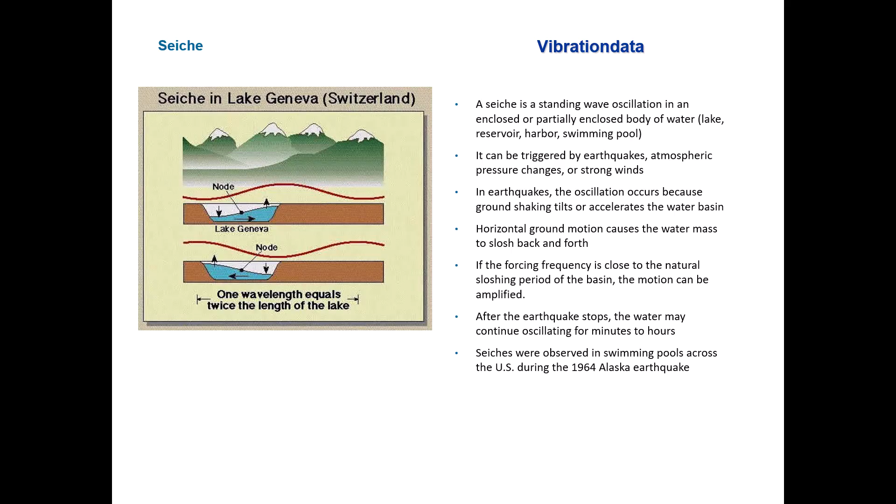Seiches were observed in swimming pools across the United States during the famous 1964 Alaskan earthquake, which we've discussed in a previous unit.

The Seiche fundamental frequency is 1 over 2L, L being the basin length, square root underneath gravitational acceleration times H, the water depth. The period is the inverse of that Seiche fundamental frequency.

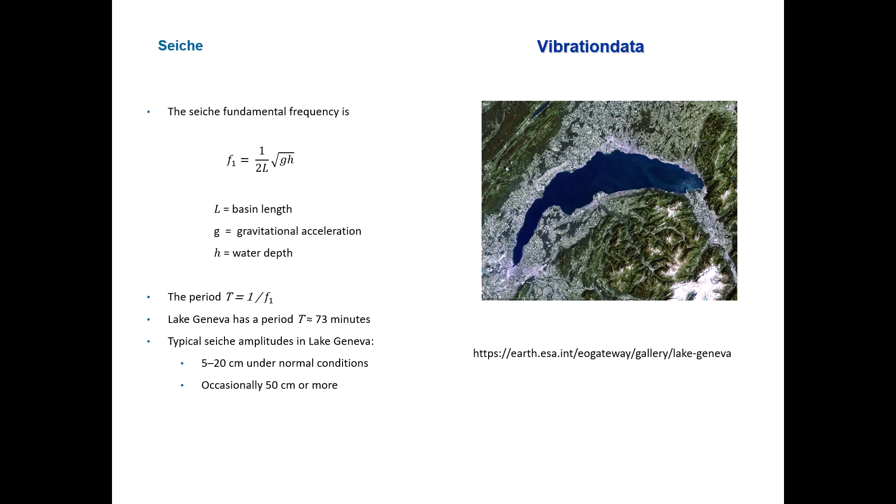For Lake Geneva, its period is about 73 minutes. The amplitudes in Lake Geneva under normal conditions may be 5 to 20 centimeters, and occasionally up to 50 centimeters or more. It's an interesting photograph there.

Seiches in the Great Lakes are always present at some low amplitude level. The lakes are so large that they're constantly being nudged into oscillation by the passing weather, such as pressure gradients, wind stress, etc., but not really much by earthquakes.

That's not a very active seismic area. So mostly weather rather than earthquakes.

Here is a Rayleigh wave. We've talked about Rayleigh waves before. They're surface waves, and they have a rolling motion, but the motion of the particles, or water molecules, or the ground, whatever it might be, is counterclockwise.

We call that retrograde. When a Rayleigh surface wave passes, the ground motion includes both vertical and horizontal displacement. The ground motion produces a temporary tilt of the basin floor.

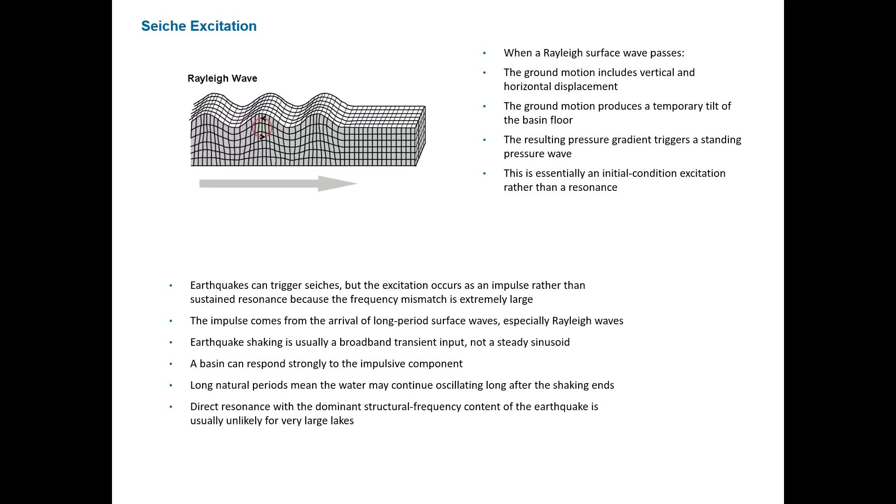Now, sometimes these tanks are bolted into the ground or anchored into the ground, and sometimes they're not, and we'll talk about that later on.

During earthquakes, liquid stored in tanks oscillates, and this is, as we mentioned, sloshing, or also known as convection, and damage can result. The roof can be damaged from liquid impacting on floating or fixed roofs, spills over tank walls leading to environmental release or fire in the case of a petroleum product.

Tanks can also undergo buckling modes. There are several types of buckling that are unique, or somewhat unique, to tanks.

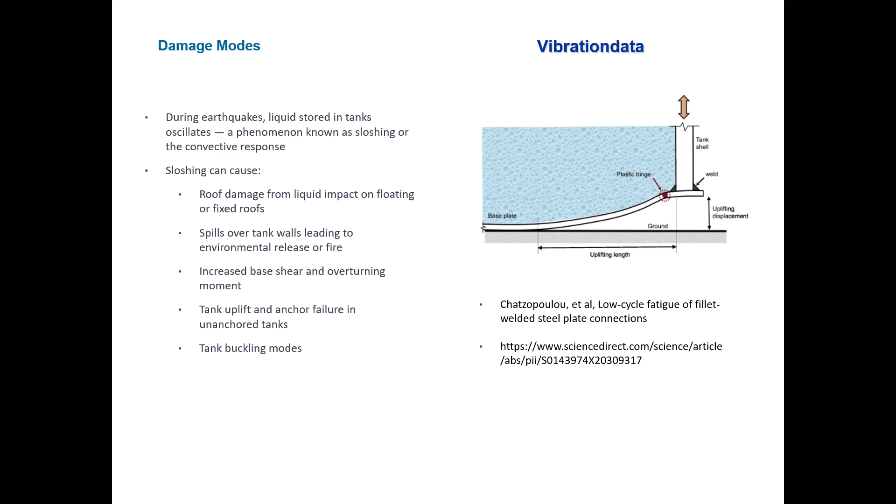During earthquakes, liquid stored in tanks oscillates, and that's sloshing or a convecting response. This can cause roof damage from the liquid impacting on the floating or fixed roofs, spills over tank walls leading to environmental release or fire, increased base shear and overturning moment, and tank uplift and anchor failure in unanchored tanks.

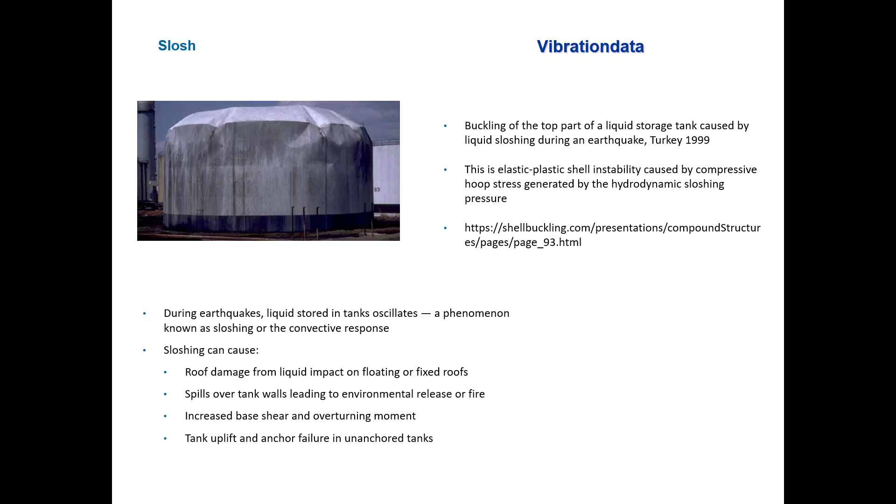Instead of complex fluid simulations, engineers represent the liquid as a system of discrete masses to calculate the forces and the torques exerted on the tank.

This model goes by several other names: the Slosh-Housner two-mass model, also referred to as a two-pendulum or multi-mass spring model. It's a simplified mechanical analogy used to predict the dynamic behavior of liquid in a moving container, such as a tank. It separates the liquid response into the impulsive and convecting, or sloshing, components with a conceptual, not physical, dividing line. The convective layer undergoes sloshing, so that's the top layer—it's going to have the slosh. You can see the slosh waveform at the surface, while the impulsive layer remains rigidly attached to the tank.

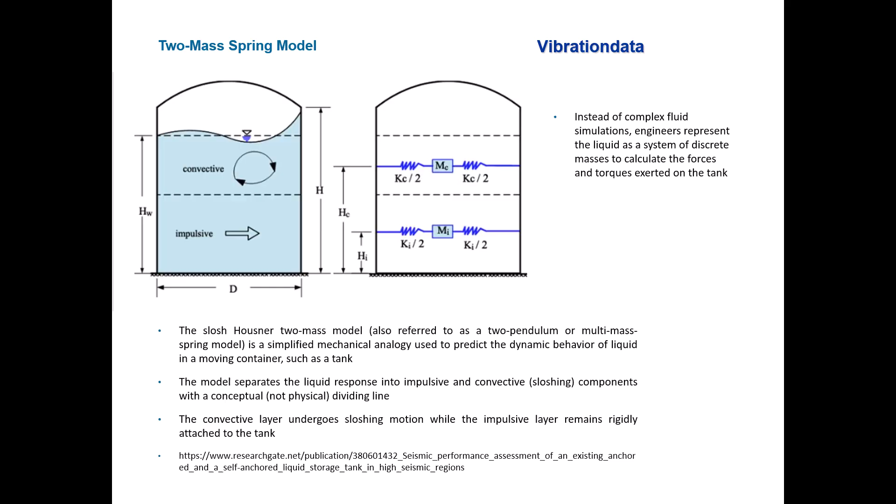The bottom mass is the impulsive component. The liquid moves together with the tank wall, resembling a rigid body acceleration with high frequency response in a short period, small displacement. It puts a large force on the tank wall, typically with a period of 0.1 to 0.5 seconds.

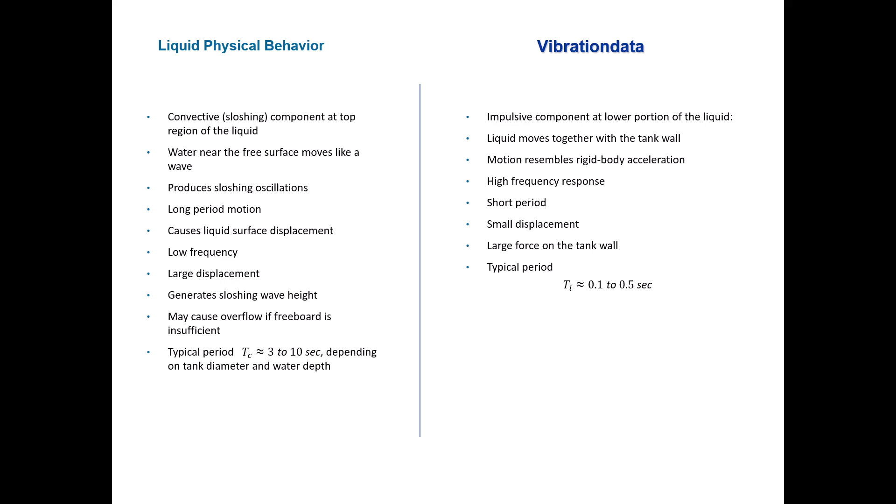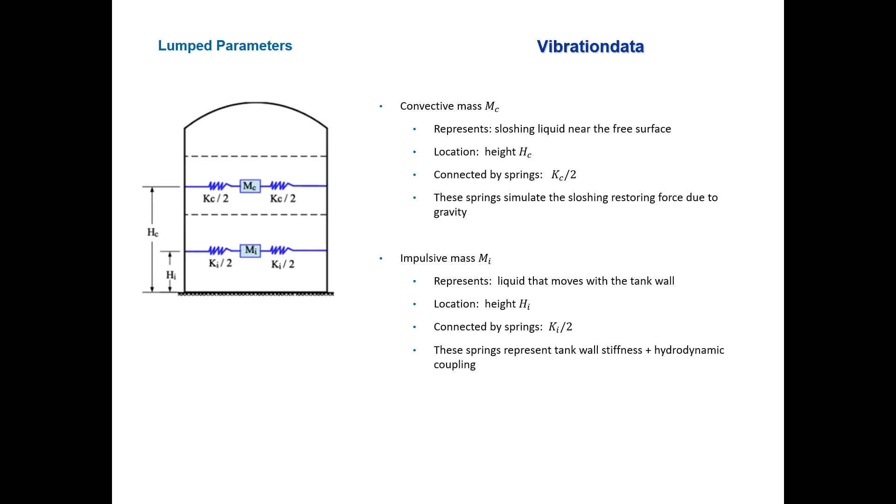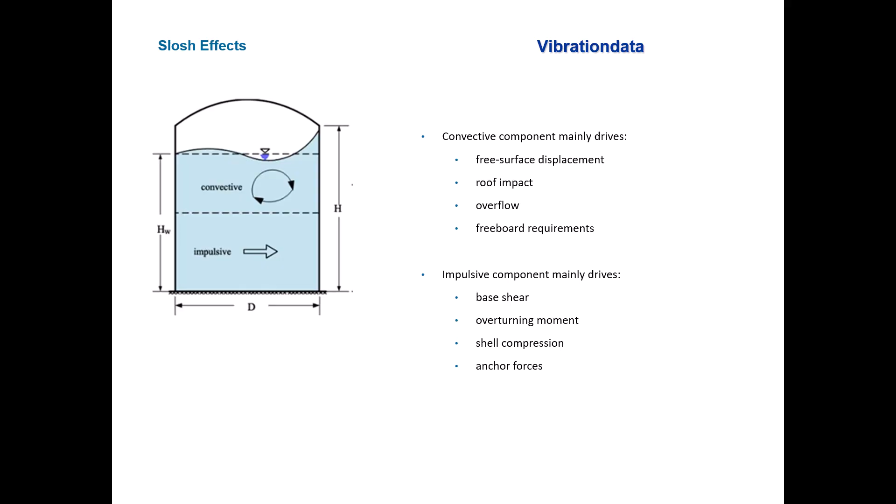Here's that familiar image again we saw before. The convective component mainly drives the free surface displacement, roof impact, overflow, and the freeboard requirements—again, freeboard is the extra room available at the top. The impulsive component mainly drives the base shear, the overturning moment, the shell compression, and the anchor forces.

Now here's a community water tank, fairly large one, up in the hills. Kind of looks like California. To show that you probably have one of these maybe in the area where you live, or you've seen these sorts of tanks before.

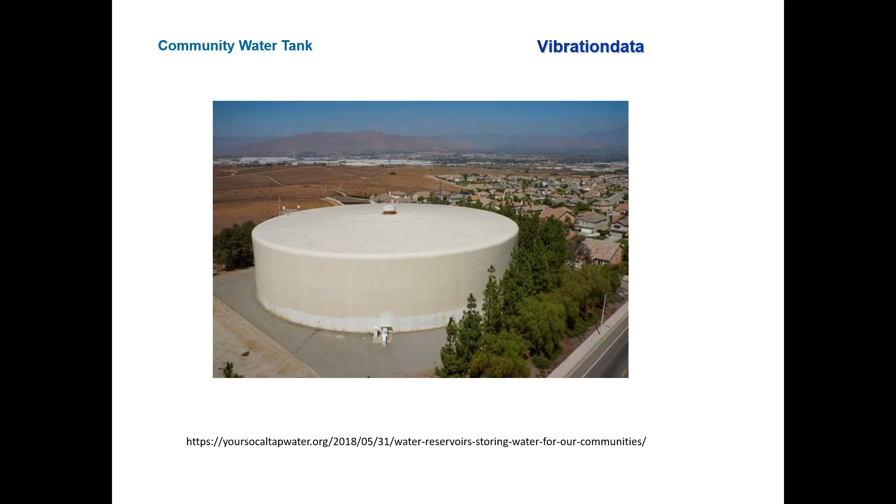Height and forces. We're going to do some calculations for forces and then the overturning moments. D will be the tank diameter, H the total liquid height, including the vertical displacement due to sloshing, HW the nominal height of the water or liquid. If I say water, you can substitute liquid. Height of impulsive mass, H sub I, and H sub C, the height of the convecting mass.

So the impulsive force for the lower mass, the impulsive mass, M sub I. F sub I equals M sub I times S sub A, which is a function of T sub I, which we need to define, and we'll do so shortly. And that acts at height HI and governs shell stresses.

And then the convecting force from the top mass, FC equals MC times S sub A, but now it's a function of T sub C. So T sub I is the period for the oscillations of the impulsive mass, and T sub C is the period for the oscillations of the convecting mass.

Now this S sub A as a function of T, whether it be T sub I or T sub C, is the peak acceleration response of a single degree of freedom oscillator with a natural period T, subjected to the earthquake motion, as taken from ASCE 7-22 response spectrum or elsewhere.

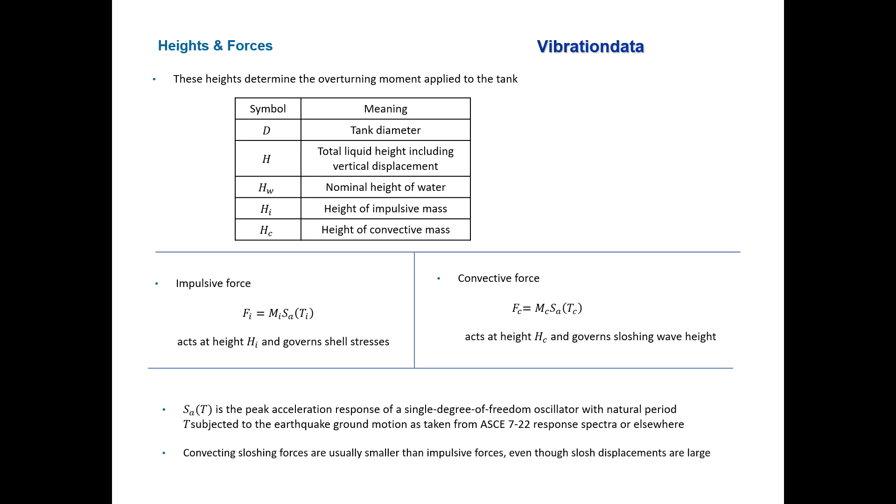So the total base shear is then V, and it's F sub I plus F sub C. And that can be used for anchorage and shell shear and so forth, sizing fasteners, and the anchor bolts.

And then the overturning moment is going to be M sub 0, and it's F sub I times H sub I from the impulsive, plus F sub C times H sub C from the convective. And the overturning moment is used for uplift. We talked about uplift before - anchorage design, shell compressive stress check, and foundation stability.

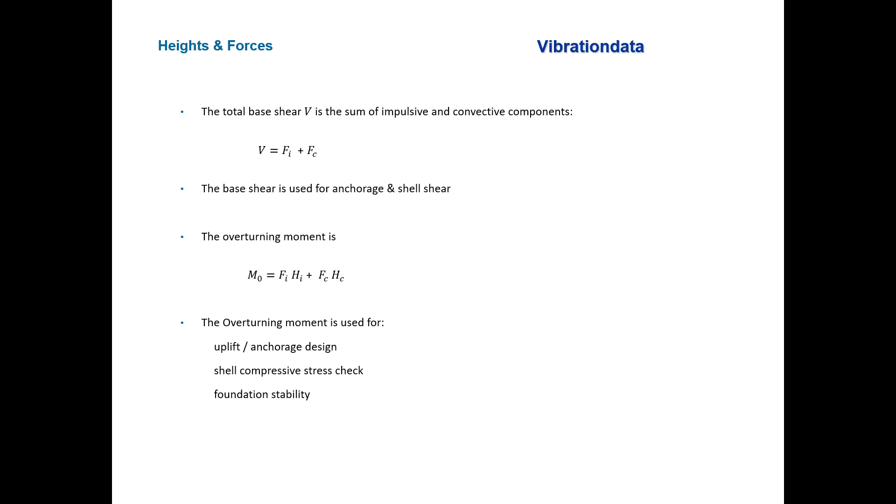Slosh wave height, delta sub S. So the maximum vertical displacement of the sloshing liquid at the shell is defined by delta S as follows: 0.2 times R, being the nominal tank radius, and then we've got A sub F.

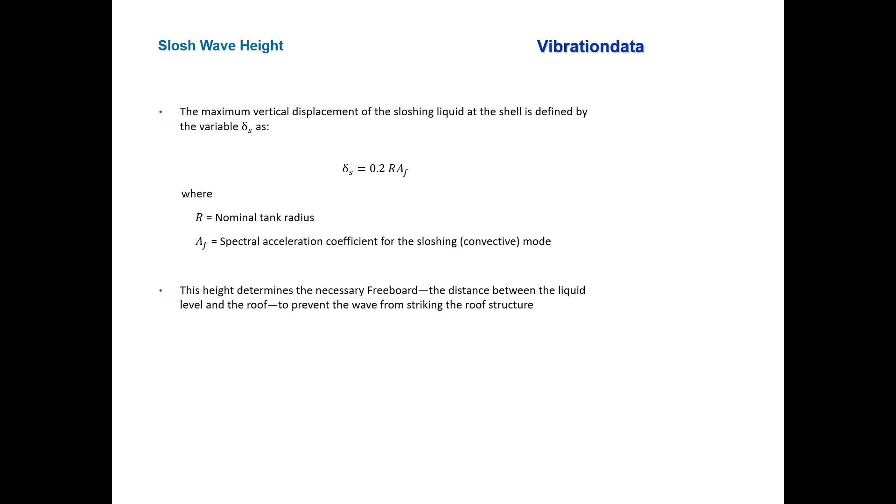A sub F is going to be a spectral acceleration coefficient for the sloshing or convecting mode. So we need to figure out where A sub F comes from. This height determines the necessary freeboard, the distance between the liquid level and the roof, to prevent the wave from striking the roof structure.

Spectral coefficient. So we're going to refer to the API 650 standard to get our A sub F, and that depends on where the convecting period Tc falls relative to the transitional long period T sub L. T sub L represents the boundary where the seismic ground motion transitions from being constant velocity to constant displacement, and comes from ASCE 7-22 based on the geographical location.

Then S sub D1 is the design spectral acceleration for a 1 second period, from ASCE 7-22. So we need both API 650 and ASCE 7-22 to make this calculation all come together.

So if Tc is less than or equal to TL - again Tc is the convecting period - then AF is equal to 2.5 K. We need to define what K is, and we'll do so shortly. SD1 is going to come from ASCE 7-22, and then 1 over Tc.

And then if Tc is going to be greater than TL, then we have AF is equal to 2.5 K SD1, and now we've got TL divided by Tc squared.

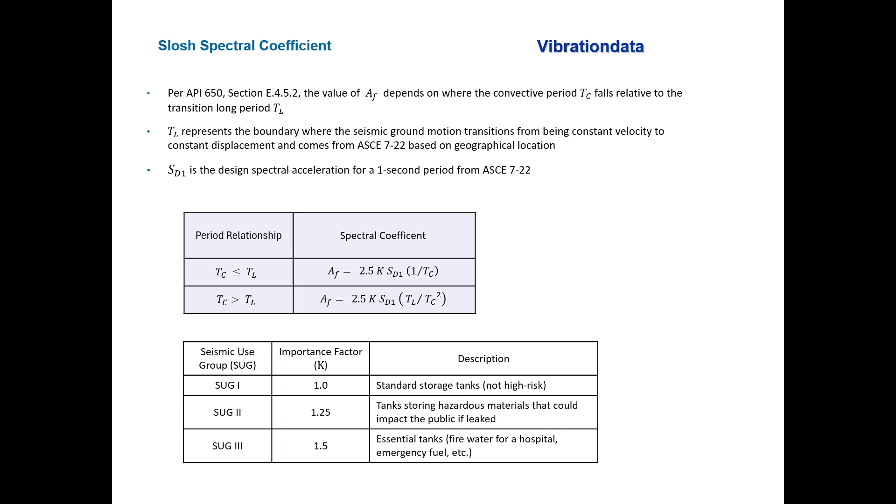So the K factor can be cross-referenced to a seismic use group, and it's going to be 1 for standard storage tanks - they're not high risk. It's going to be equal to 1.25 for tanks storing hazardous materials that could impact the public if leaked. And that will be equal to 1.5 for essential tanks - fire water for a hospital, emergency fuel, etc. So if you want to be conservative, then set that K value equal to 1.5.

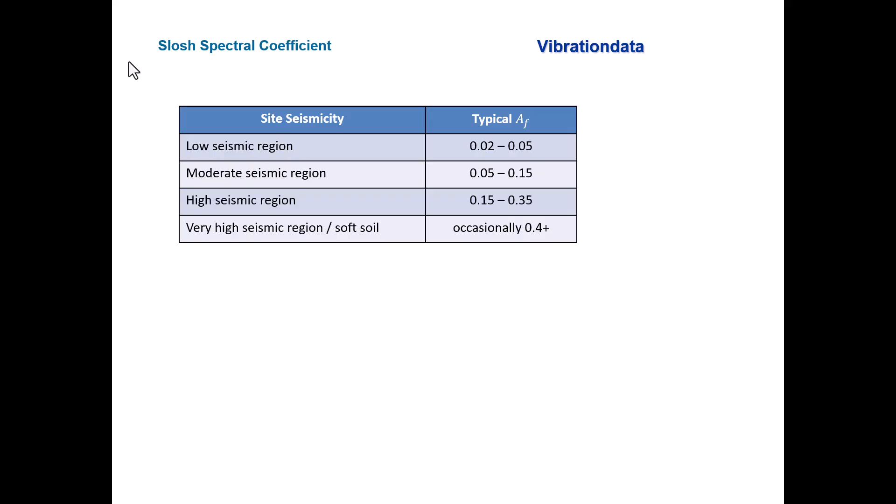And here's some sample slosh spectral coefficients and typical A sub F values. For a low seismic region, A sub F could be up to 0.05; for a moderate seismic region, 0.05 to 0.15; high seismic, 0.15 to 0.35; and for a very high seismic region or with soft soil, occasionally that coefficient A sub F can be above 0.4.

We'll have to do some MATLAB exercises. So here's the main GUI package: structural dynamics, then seismic, then select analysis, API 650, and Slosh and analyze.

We're on English units, and we'll be on Slosh wave height. So the height determines the necessary freeboard, which is the distance between the liquid level and the roof to prevent the wave from striking the roof.

Diameter of our tank is 150 feet, fairly large. Our coefficient is going to be A sub F, and it's going to be 0.1. Here's a little reminder chart we just saw on the previous slide, just as a guideline. We're assuming we're right in the middle of a moderate seismic region, and then we'll calculate.

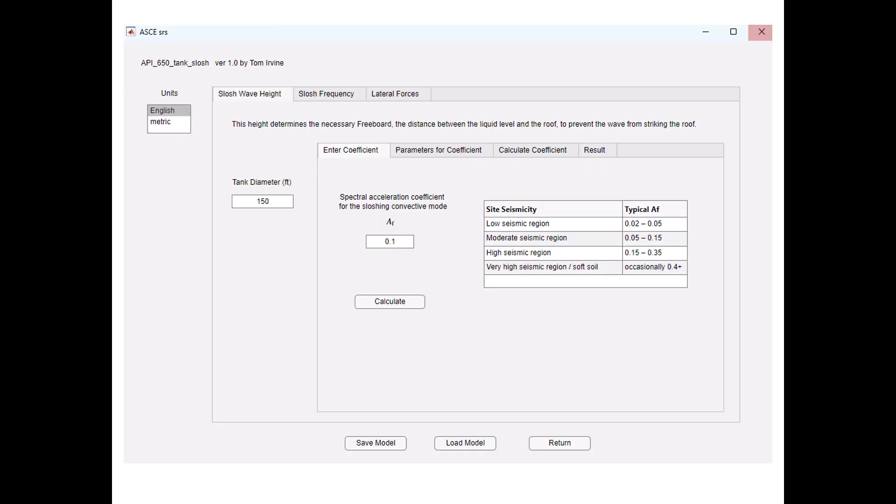For our tank diameter of 150 feet, the slosh wave height is 18 inches. So that's important to know.

Next, we're going to take a look at the lateral force tab, same API 650 tank slosh script. We have to add some parameters here: the top convective mass, that is 60,000 lbm, pounds mass. The bottom impulsive mass is going to be 340,000 lbm. The top convective height is 36 feet, and the bottom impulsive height is 11 feet. Again, those are referenced to the ground level.

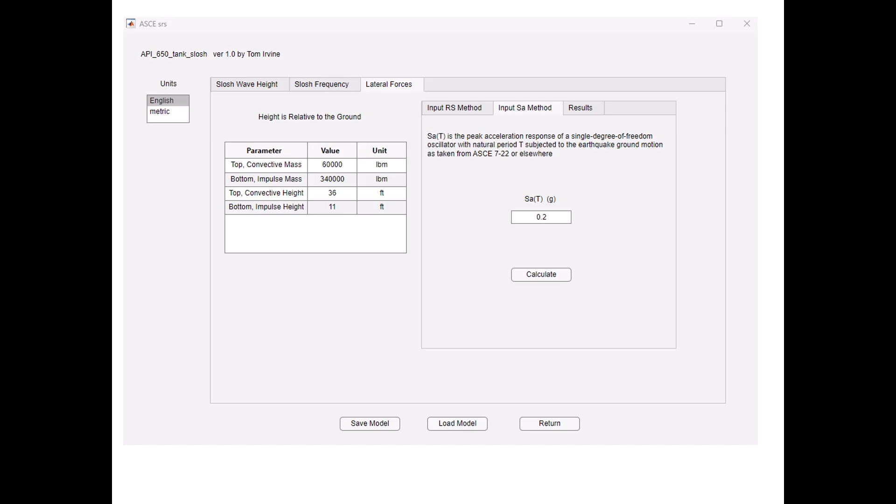Let's go to input SA method. SA is a function of the period t, the peak acceleration response of a single degree of freedom oscillator with a natural period t, subjected to the earthquake ground motion, taken from ASCE 7-22 or elsewhere. Our value today will be 0.2 Gs. We'll calculate.

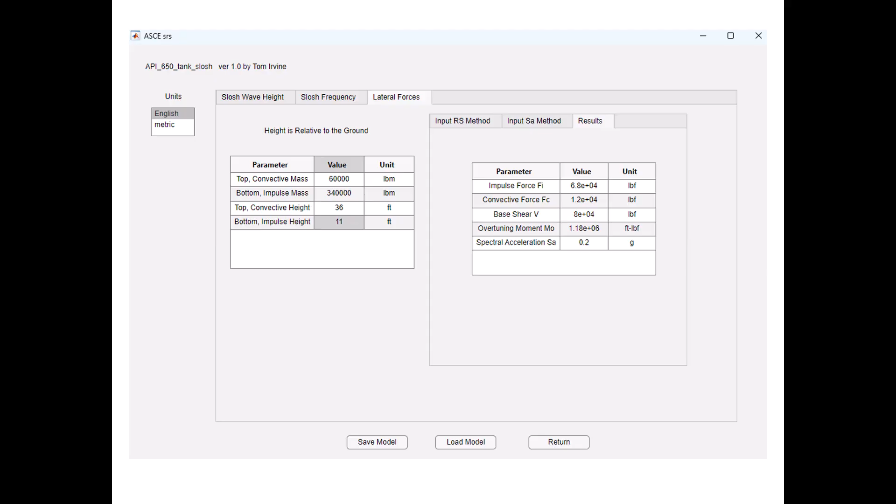And here are the results. We have the parameters, and the impulsive force is going to be 68,000 pounds force. The convective force is going to be 12,000 pounds force. If we add those two forces together, the base shear is going to be 80,000 pounds force. Our overturning moment is going to be 1.18 million foot-pounds. And the spectral acceleration, which is actually an entry parameter, SA, is 0.2 G.

So the results: the base shear is useful for a sliding check and an anchor and shell-to-bottom design. The overturning moment is useful for anchor bolt tension, uplift, and soil bearing pressure, and typically is the governing parameter rather than shear.

The impulsive force, Fi, we can take that and do some calculations for shell stress using API 650 Appendix E. We can calculate the hoop stress from hydrodynamic pressure, the anchor demand, and then the convective force and the sloshing effects and the freeboard and the roof impact. So that is the usefulness of the results.

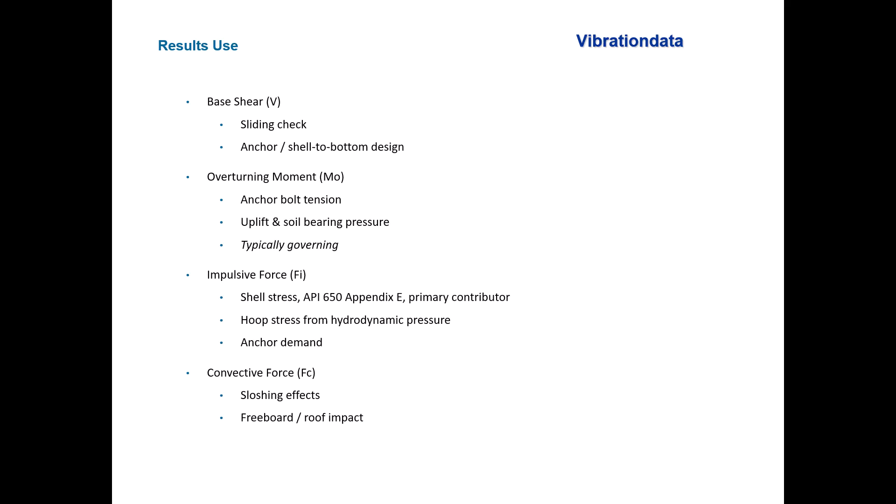For the hoop stress, sigma sub theta z is equal to the total pressure at height z, which would include hydrostatic plus any dynamic forces. We have r, the tank radius, divided by the shell thickness t. So the total pressure is the sum of the hydrostatic and impulsive pressures. The convective force is typically excluded from shell stress since it acts on a free surface.

The maximum stress tends to occur near the bottom of the tank. For a hydrostatically loaded upright cylindrical tank with a typical open top, the shell carries hoop stress but essentially no longitudinal membrane stress.

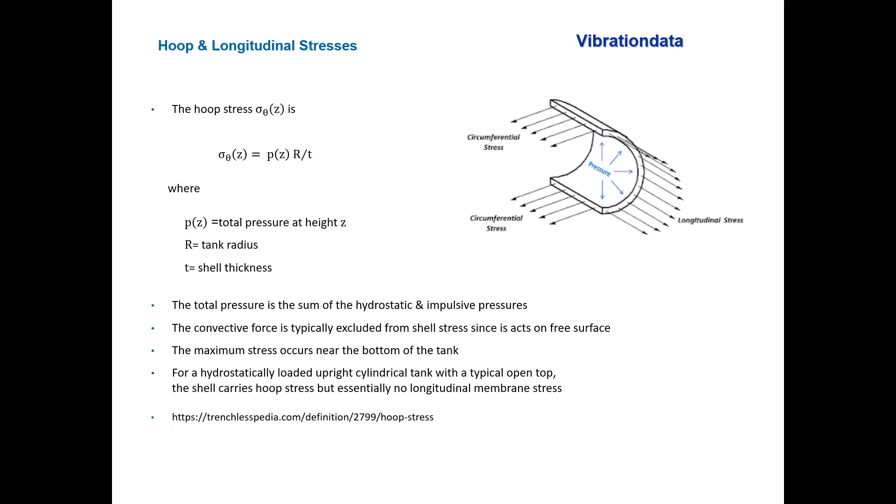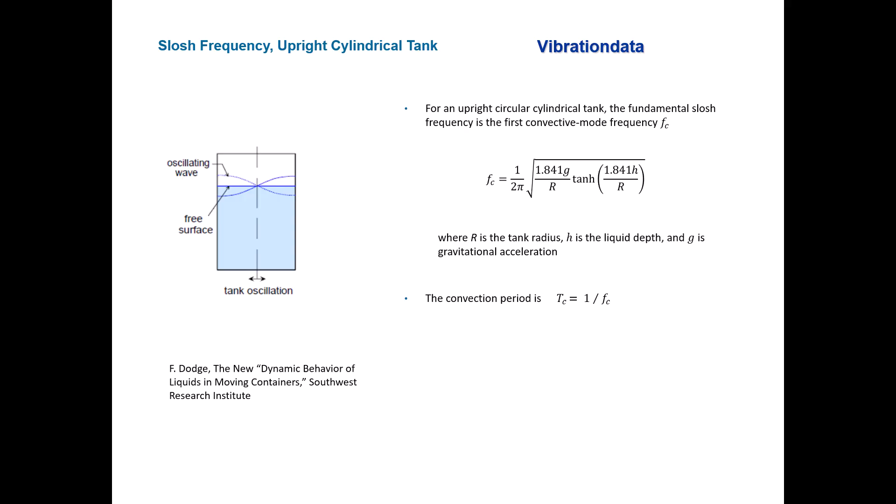And r is the radius. The convective period, Tc, is equal to 1 over the frequency Fc.

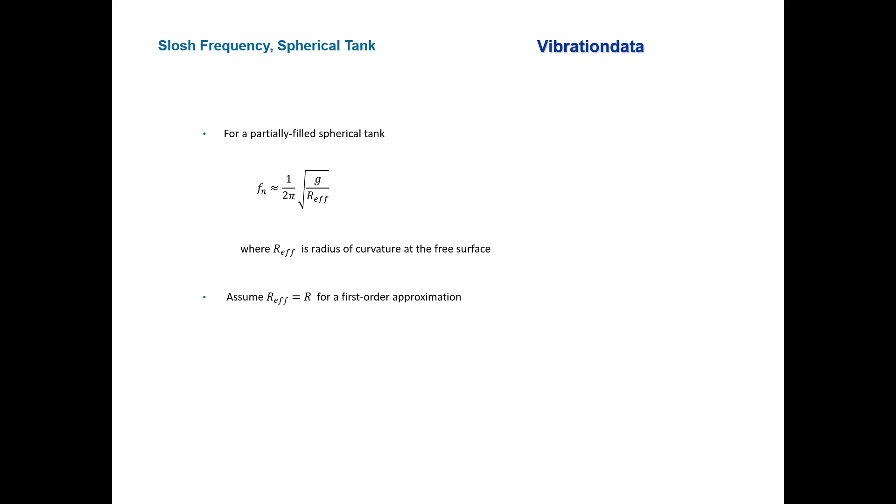For a partially filled spherical tank, we have a different equation: Fn is 1 over 2 pi, square root underneath g over r effective, the effective radius, which is the curvature at the free surface. For practical purposes, we can just do a quick approximation and say the effective radius is the same as the actual radius.

Let's do a little MATLAB exercise here. Go back to structural dynamics, to seismic, to API 650 tank slosh, where we just were a few minutes ago. This time we're going to go to the tab for slosh frequency. We'll still be in English units. Here's our 150-foot tank, with a height of 40 feet.

The convective slosh results are going to be a frequency of 0.123 hertz, and the equivalent period is about 8.14 seconds. That's within the range or family of a typical period, of course depending on diameter and height.

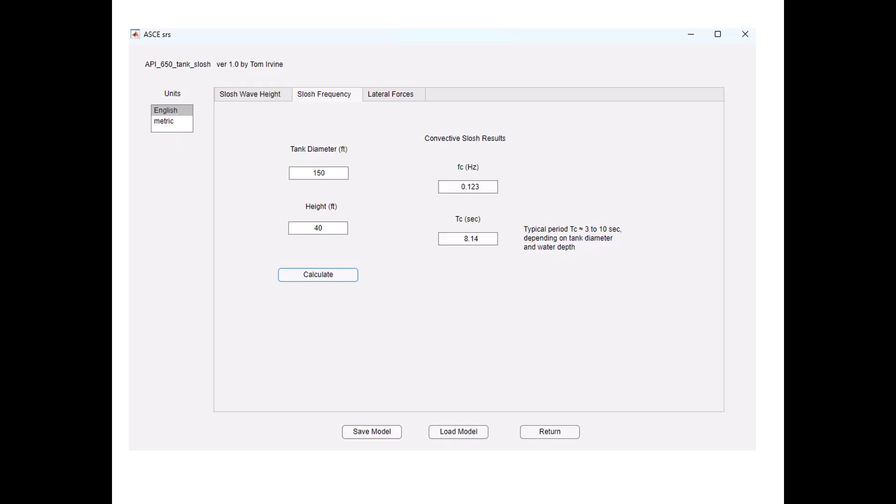Okay, tank anchoring. So we have two approaches: we can have the tank bolted down, or it can be a self-anchored tank that doesn't have any anchors.

As a practical observation, most large crude oil tanks are self-anchored because the liquid mass is enormous. The weight alone usually prevents overturning, and the anchors would be extremely large and expensive.

For the anchored tank, the anchors will prevent or at least limit uplift, but with the self-anchored tank, that uplift may occur around the outer circumference. Anchored tank: minimum rocking. Self-anchored tank: could have significant rocking.

Seismic resistance: the anchored tank has bolt tension plus the weight, and self-anchored is weight only. Our failure concern for the anchored tank is the bolts going into excessive tension, whereas for the self-anchored tank, we can have shell buckling.

Typical use: anchor tanks for smaller or tall tanks in high seismic areas, and self-anchored for large oil tanks with heavy contents. Remember that image we saw earlier today with the 1999 Turkish earthquake, and there was that buckling at the top of the tank - that was most likely a large crude oil tank that was self-anchored.

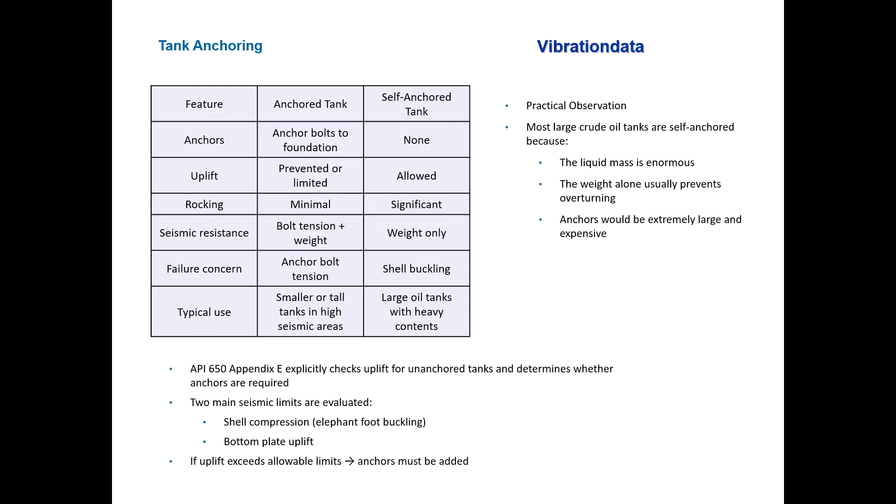API 650 Appendix E explicitly checks uplift for unanchored tanks and determines whether anchors are required. The two seismic limits that are evaluated are shell compression - we're going to see an image of something called elephant foot buckling here shortly - and bottom plate uplift. If the uplift exceeds allowable limits, then anchors must be added.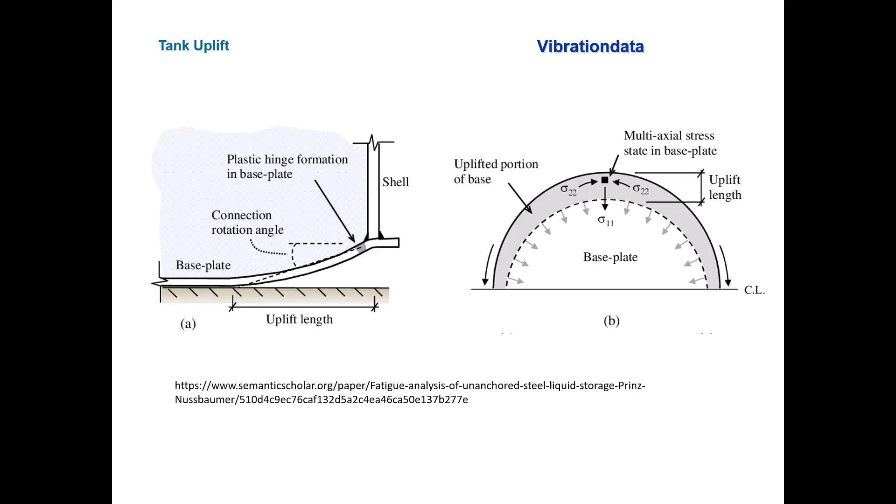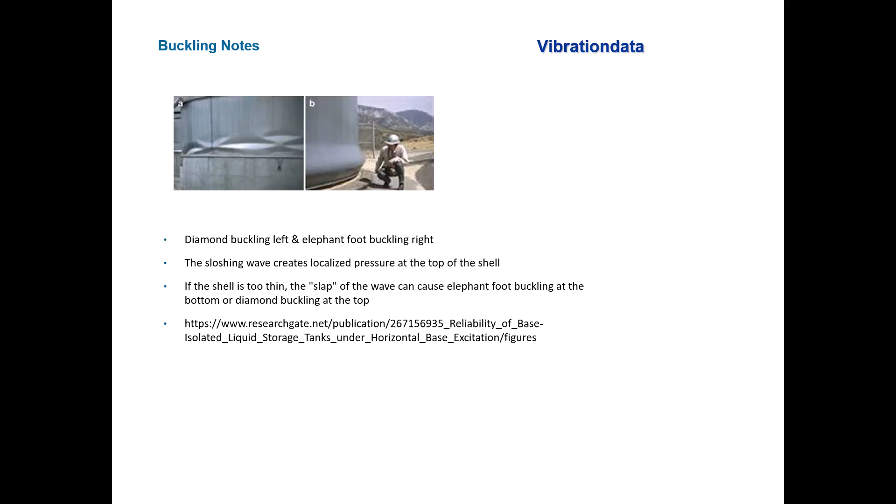Buckling notes: on the left we have diamond buckling, and on the right we have elephant foot buckling. The sloshing wave creates localized pressure at the top of the shell, and if the shell is too thin, the slap of the wave can cause elephant foot buckling at the bottom, or diamond buckling at the top, or diamond buckling could be elsewhere in the tank.

Tank roofs: on the left, fixed roof. On the right, floating roof, both containing liquids with vapor as well.

Floating roofs eliminate the free liquid surface, effectively suppressing convective sloshing loads that are the primary cause of earthquake-related tank damage, such as roof seal fires and liquid overflow.

Floating roofs increase the impulsive hydrodynamic loads on the tank shell and foundation, since more of the liquid mass moves rigidly with the tank shell rather than sloshing independently.

The roof structure itself becomes a seismic vulnerability. Support legs, seals, drains, and rolling ladders are all susceptible to earthquake damage, and a sudden floating roof sinking can trigger a catastrophic full surface fire.

Overall, floating roofs represent a trade-off rather than a net seismic improvement, and design standards such as API 650 Appendix E require special seismic detailing to manage their unique failure modes in active seismic regions.

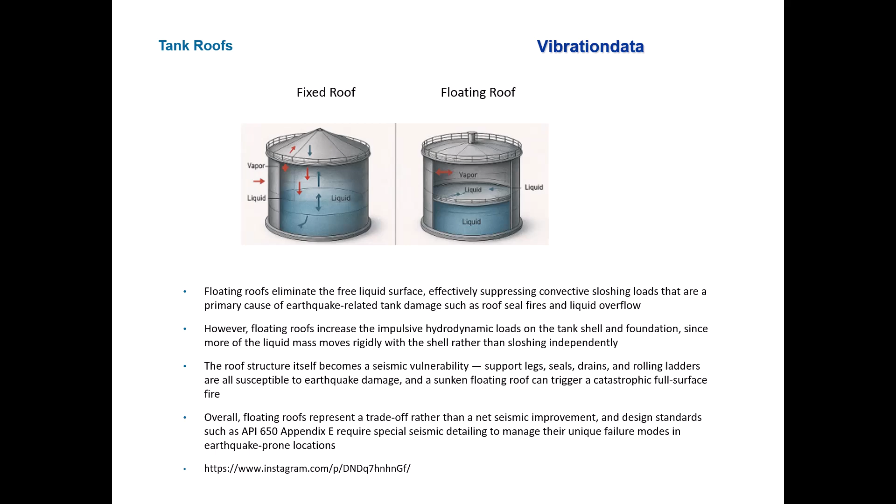Some damping notes. The image on the right is actually from a NASA document. Certain launch vehicles have liquid propulsion tanks, others have solid propellant, and if there's a liquid propulsion tank, then sloshing is a risk.

It's very common to have baffles, such as the annular ring baffle shown on the right. Sloshing effects are calculated using a lower damping value, usually about 0.5%, compared to structural impulsive mass at 5%, because liquid friction is much lower than structural damping.

Liquids like liquefied natural gas (LNG) and water have very low kinematic viscosity, leading to minimal internal friction during oscillation. The 0.5% damping value for the slosh is a realistic, or even slightly conservatively low, estimate for the convective sloshing component for low viscosity liquids.

High viscosity liquids like crude oil tend to have higher kinematic viscosity, which increases energy dissipation as the liquid layers slide against each other and the tank walls. For these heavy contents, the actual damping may be slightly above 0.5%, though design codes such as API 650 often maintain the lower value to ensure a conservative safety margin for wave height and freeboard requirements.

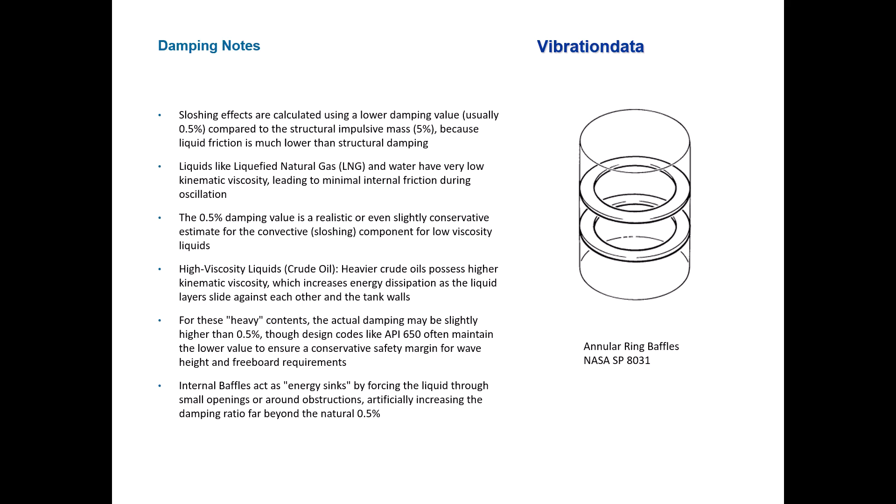Water towers are not just tanks. What this is, is a cantilever beam, a very tall cantilever beam with an end mass. That's what it's acting like, and there can be significant dynamic amplification. The governing behavior is the structural effects and then the fluid coupling that occurs due to the fluid in that spherical tank mounted at the top.

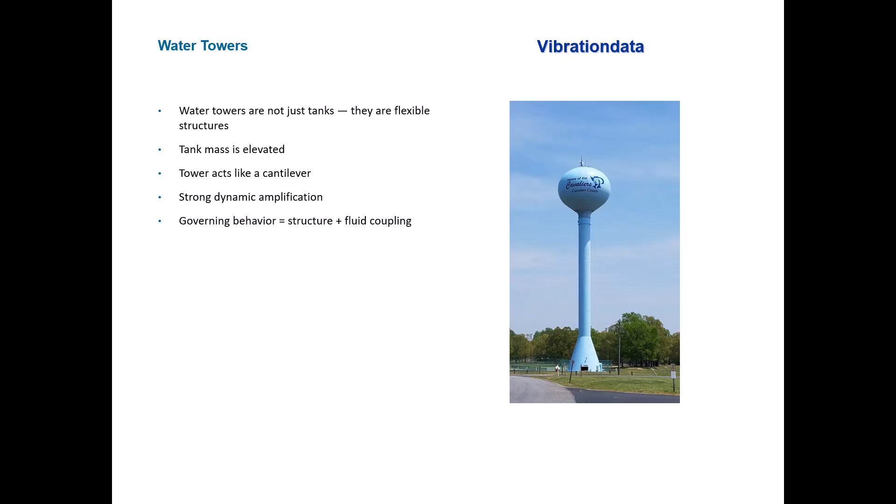Here is a water tower natural frequency. I don't have this in MATLAB, but I need to take an action item to put this in. So let's assume the shaft, the cylindrical support, is linear elastic with a uniform cross-section. The tank is rigid, no shell flexibility. The soil is rigid, fixed base. For soft soils, soil structure interaction reduces F sub n further. And small amplitude, linear type vibrations.

So here is our fundamental natural frequency equation: 1 over 2 pi, square root. In the numerator, 3 times elastic modulus times area moment of inertia, divided by the length cubed. In the denominator, the mass of the tank and its water contents, 0.67 times the water mass, plus 33 divided by 140 times the mass of that support shaft. There's a note that the 33/140 factor is the classical Rayleigh correction for a distributed mass cantilever contributing to tip oscillation.

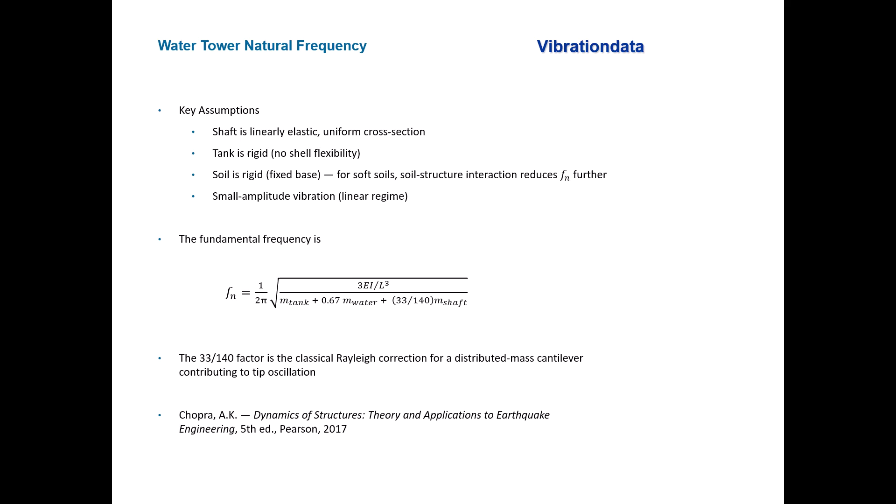Okay, Seiche and slosh mitigation. We talked about LNG, liquid natural gas or liquefied natural gas, and petroleum tanks and large water reservoirs. Increase freeboard to prevent overtopping - freeboard is the vertical distance between the normal liquid surface and the top edge of the container. Install internal baffles to dissipate wave energy - not altogether sure how common that is, but that certainly is an option, maybe not for community water tanks. Strengthen walls and tank shells for sloshing loads. Provide anchorage and strong foundation.

Perform dynamic sloshing analysis during seismic design. Account for both impulsive and convective sloshing mass components. Guard against elastic plastic shell buckling, such as that elephant foot we saw, from compressive hoop stress. There are several design codes to take a look at. We've mentioned API 650 several times. There's also Eurocode 8 and a couple other standards there at the bottom.

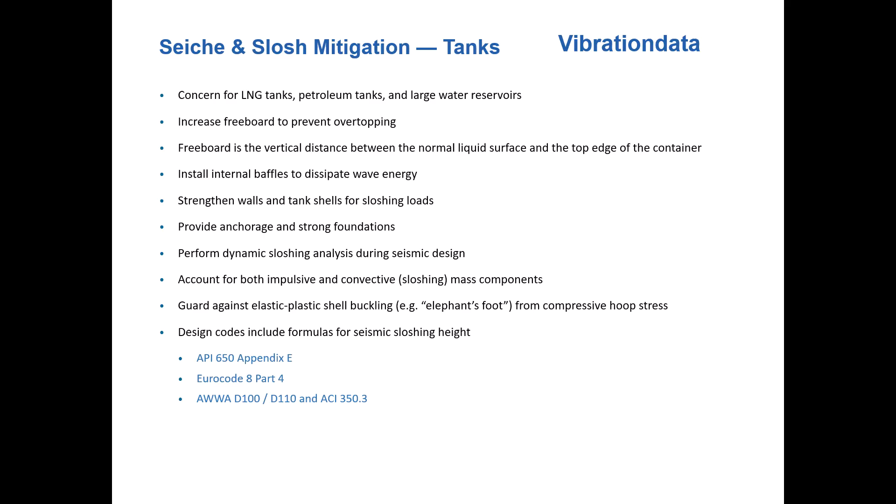So, Seiche and slosh mitigation for harbors. Harbors, marinas, semi-enclosed basins - the Seiche are excited by wind, atmospheric pressure jumps, tsunamis. We'll talk on the next slide about a meteotsunami. Of course, an earthquake can be a source of a tsunami as well. Resonance occurs when the forcing period matches the basin's natural Seiche period.

Modify basin geometry to avoid resonance. Design harbors with wave damping geometry. Use breakwaters and absorbing boundaries to reduce reflected wave energy. Maintain adequate berth clearance and mooring design for surge motions. Provide freeboard on quay walls and bulkheads to prevent overtopping. Perform basin response analysis to identify amplification, harbor resonances, and something called a harbor paradox that I need to take an action item to look up.

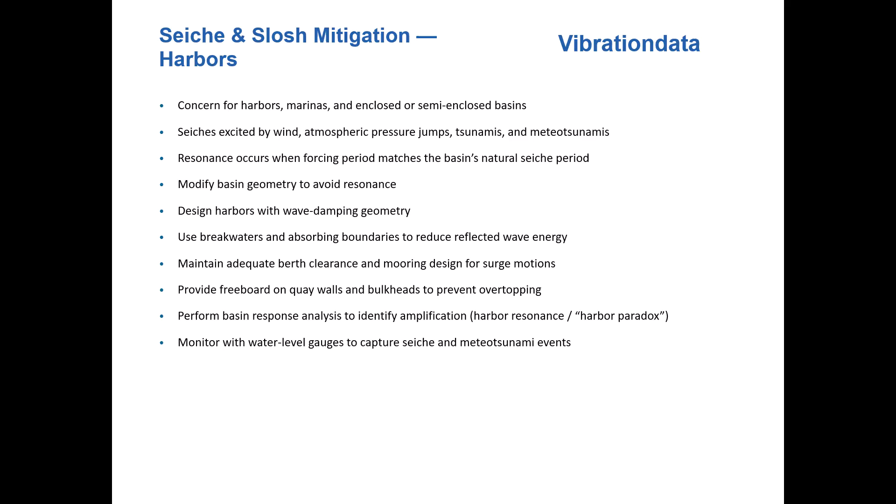A derecho, pressure jump, amplified by Proudman resonance. The disturbance travels near the long wave speed, square root of g times h, pumping energy into the wave over a long fetch, most efficient over broad, shallow continental shelves, further amplified at the coast when a bay or harbor Seiche period matches the incoming wave period - harbor resonance. This explains why certain harbors are more prone to be struck repeatedly while others stay calm.

As a typical signature, water level swings of tens of centimeters up to 2 meters, strong harbor currents, periods of minutes to tens of minutes, often arriving on an otherwise calm day after the storm has passed or while it's far offshore. It's been documented in the Mediterranean, the Great Lakes of the United States, and the U.S. East Coast and Gulf Coast.